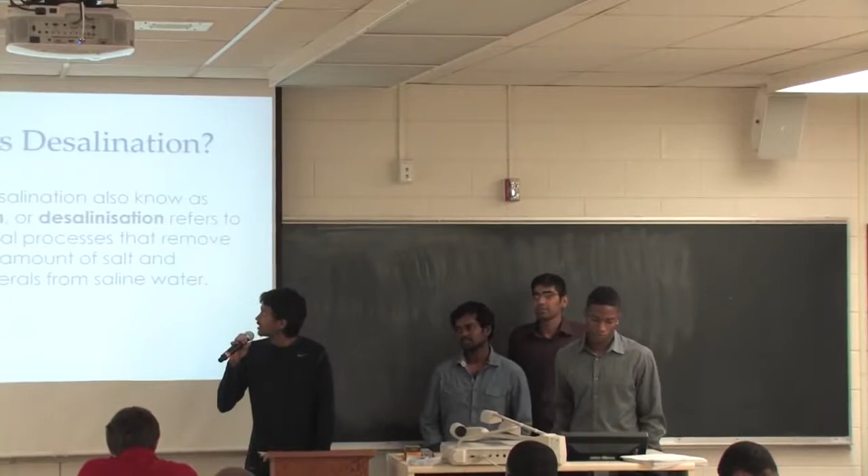Water desalination. The word itself means conversion of salt water into normal water by taking away the salt and other minerals. It's a very important process nowadays because two-thirds of the earth is covered with seawater. If we convert this seawater into normal water, we can eliminate the concept of drought in parts of the world. Moreover, it produces very little waste because the byproduct, salt, is also consumed by human beings. This is already implemented in countries like Australia and New Zealand.

Let me give you a sample, an easy process of how desalination is done. Consider a container with salt water. As we know, water's boiling point is lower than salt's. So we heat the salt water, the water evaporates first, and this evaporated water is cooled and condensed and collected into another container, separating the salt from the water and leaving the salt and other minerals as byproduct. This is how the simple desalination process is done.

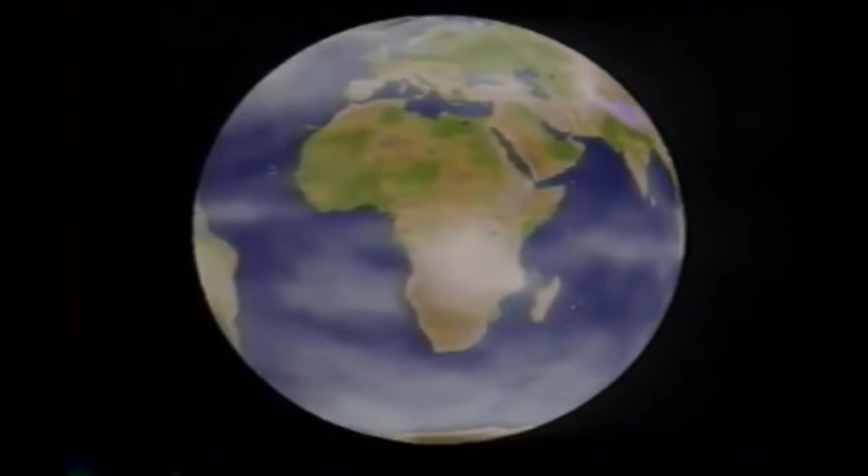The water planet. Third from the sun, and the only planet in the solar system where water exists in liquid form. In fact, three-quarters of the Earth's surface is covered with it.

Yet millions of people struggle to find enough water to survive. With the world's population growing by about 90 million people every year, the supply of usable water just isn't keeping up.

Usable is the key. The overall amount of water on the planet never changes. It's only the distribution of it that varies - as a liquid on the surface or below it, as a vapor in clouds, or as a solid at high altitudes and in the higher latitudes.

Making sure we have enough water in usable form and getting it to where it's needed is what water management is all about.

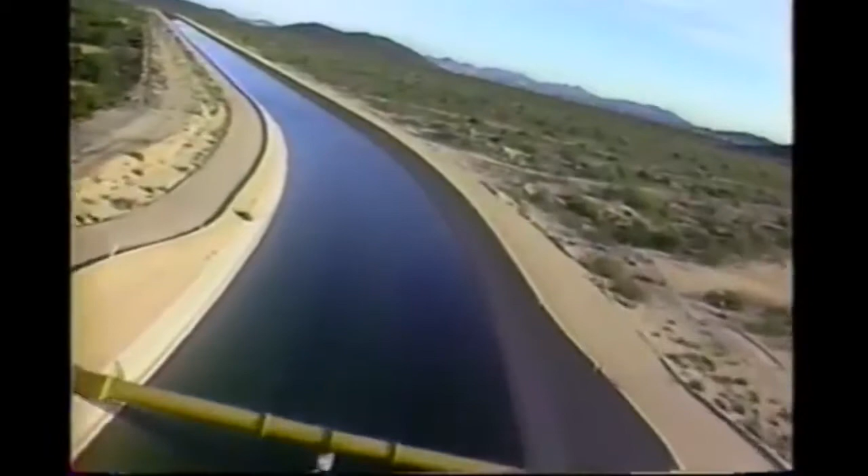Conservation is one method - using less water whenever possible. Building dams, reservoirs, and aqueducts. Cleaning up polluted water. And recycling water, especially for irrigation.

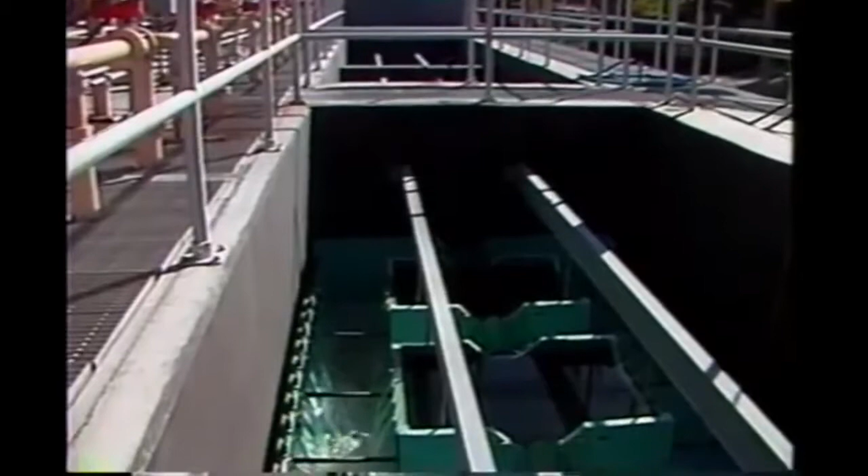Desalination, or desalting, is another method of increasing the supply of usable water. To most people, desalination means desalting seawater, unlocking the ocean's vast liquid treasure. Desalting seawater requires a lot of energy and has not been the top priority in the United States. It has been widely used in the Mideast, where the abundance of oil means inexpensive energy.

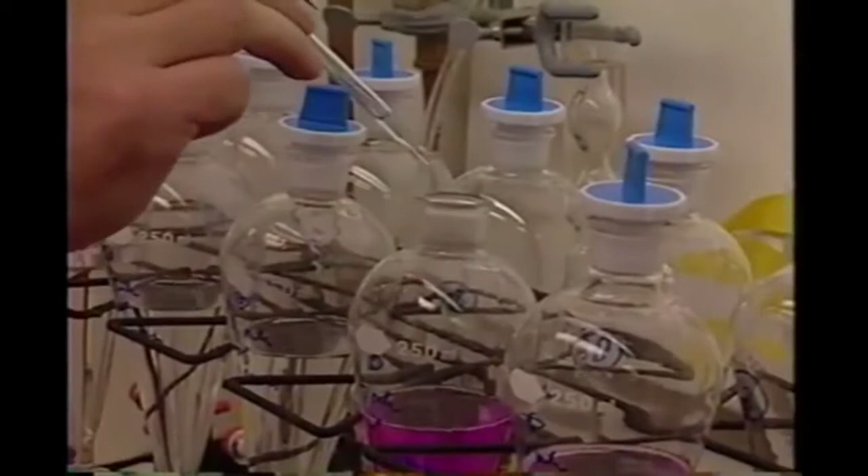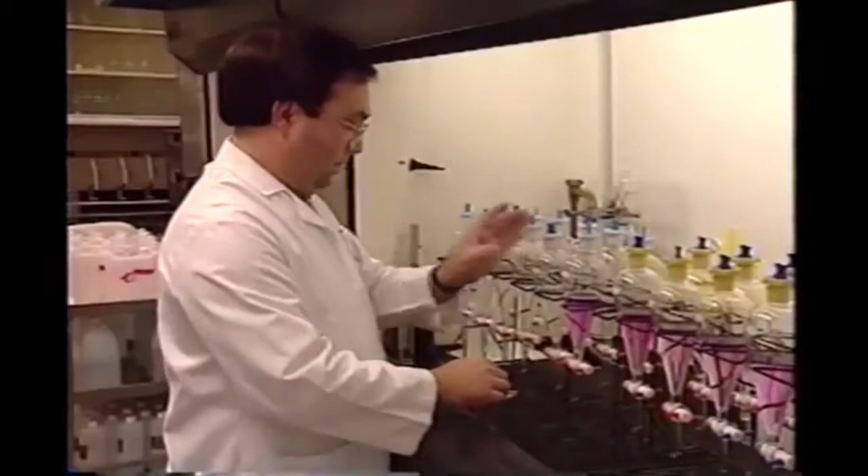But there's another use for desalination which is more practical and has just as much potential. By removing salts, minerals, and other contaminants, it can raise the quality of inland water supplies for use as drinking water or for irrigation. That's just a little bit about desalination. In the 4th century BC, Greeks...

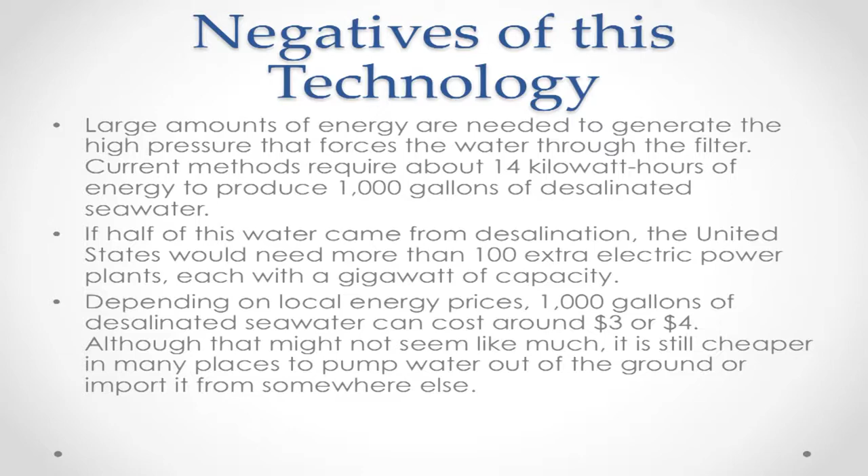Large amounts of energy are needed to generate the high pressure that forces the water through the filter. Current methods require about 14 kilowatt hours of energy to produce 1,000 gallons of desalinated seawater. Actually, these have more negative effects when we compare them to the positive effects.

The construction process also takes a lot of time, is inconvenient, and also affects the environment.

Desalination has main effects on aquatic animals. One of the major pollutants in this process is chlorine, which affects aquatic animals and leads to loss of many aquatic habitats. Moreover, one of the other drastic disadvantages of desalination is that it also pollutes the underground water. These are the main side effects of this desalination process.

Now you can popcorn. You choose if you want to pass the mic.

Multi-stage flash distillation is a water desalination process that distills seawater by flashing a portion of the water into steam in multiple stages, essentially using counter-current heat exchangers. Multi-stage flash distillation plants produce 85% of all desalinated water in the world.

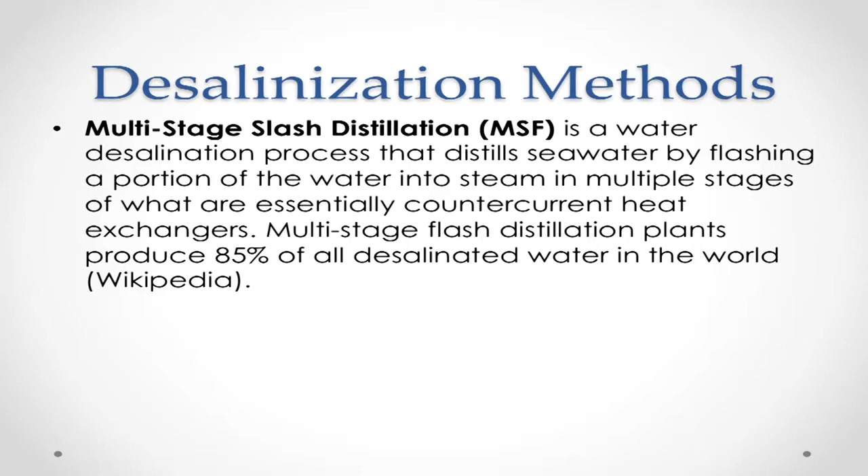As you have seen in the video, the water is evaporated and creates steam, and it again comes in the form of water when it is cooled. This is the process, and 85% of salt water is purified this way.

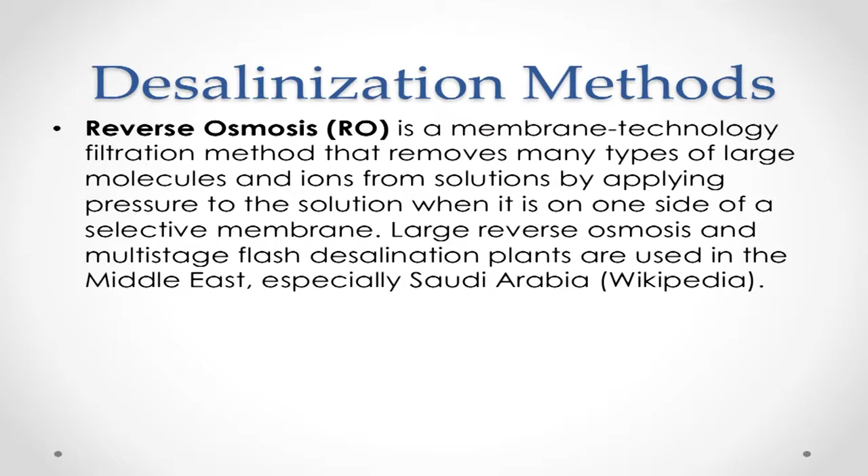Reverse osmosis is a membrane technology filtration method that removes many types of large molecules and ions from solutions by applying pressure to the solution on one side of a selective membrane. Large reverse osmosis and multi-stage flash distillation plants are used in the Middle East, especially in Saudi Arabia.

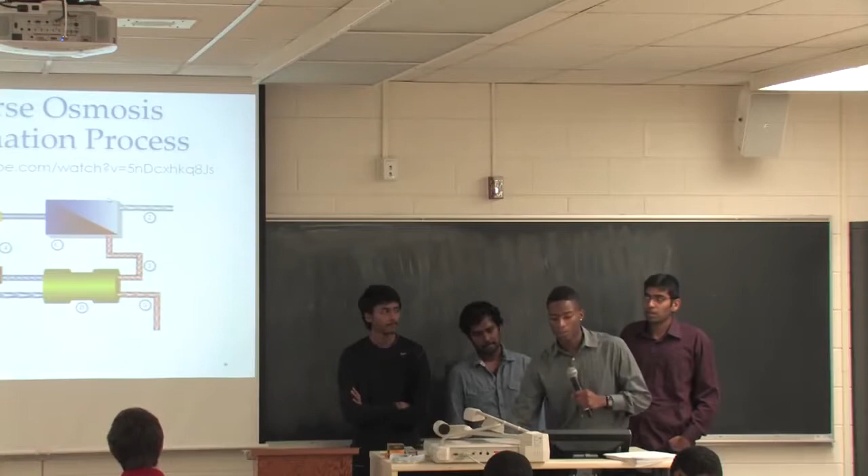This is just a video we had that was showing the whole process, but we've already kind of gone through that. I'll speak and then we'll go next.

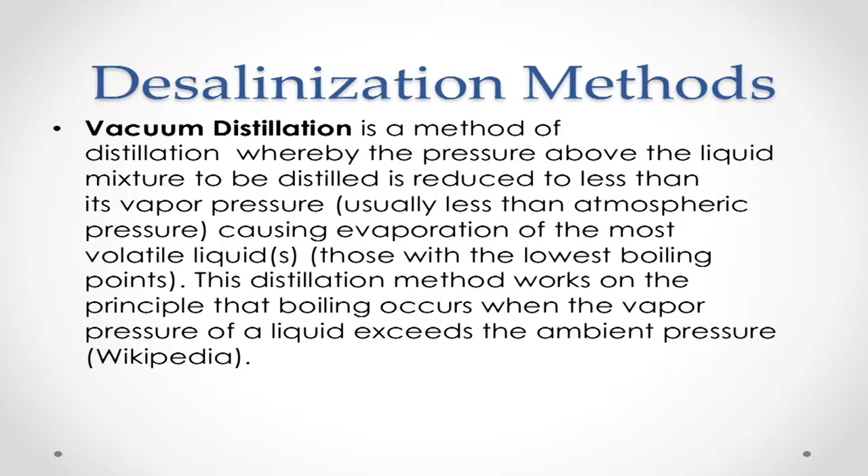Vacuum distillation is a method of distillation whereby the pressure above the liquid mixture to be distilled is reduced to less than its vapor pressure, causing evaporation of the most volatile liquids. This distillation method works on the principle that boiling occurs when the vapor pressure of the liquid exceeds the ambient pressure. This is just the most general form, where you boil the water, and since the water's boiling point is lower than that of the salts, the water evaporates, leaving excess salt and separating the water from the salt.

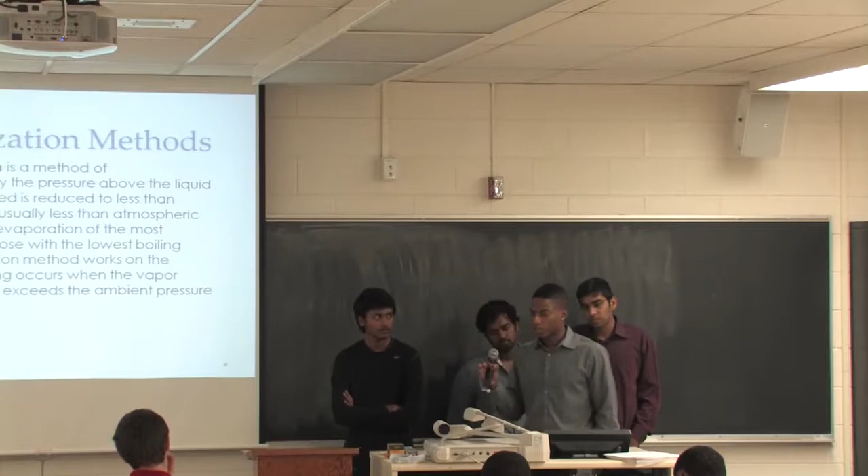Oh, okay, sorry, we need 3 more minutes. Oh, we only have 3 more minutes? Okay, we'll speed it up.

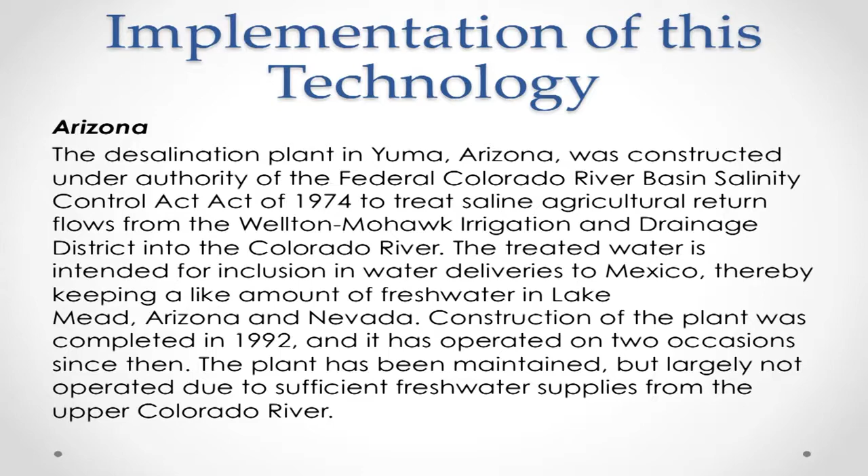We'll give you a few things about the implementation of this technology. There's actually a lot of implementation around the world. Arizona has an implementation where they constructed a plant which feeds the rivers. It's used to clean the rivers and some of the water sources out there, so it's not really so much for drinking. It's just to keep the water levels clean in those states and surrounding states.

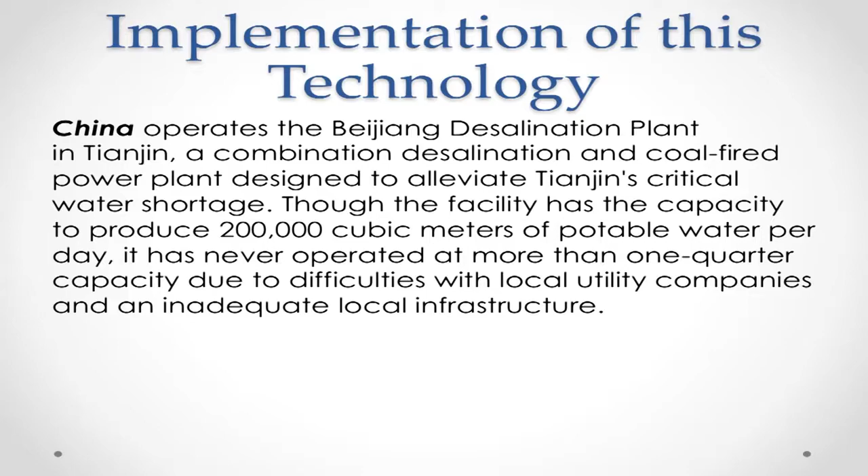China also has a major desalination plant which combines desalination with a coal-fired power plant, designed to alleviate critical water shortages.

We are implementing this technology because water is reducing day by day, and to meet the demand of the population, this technology is very useful. It is used in various countries, and according to research, different kinds of implementations are added into this technology.

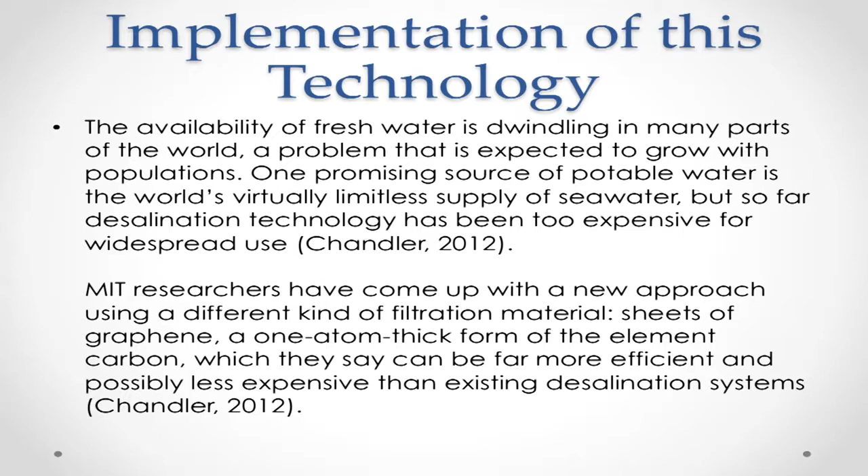Sheets of graphene are used in the filtration process, a one-atom-thick layer of carbon, which is also used in this filtration process.

Using these kinds of materials in the filtration process makes the implementation of this technology very cheap and very effective.

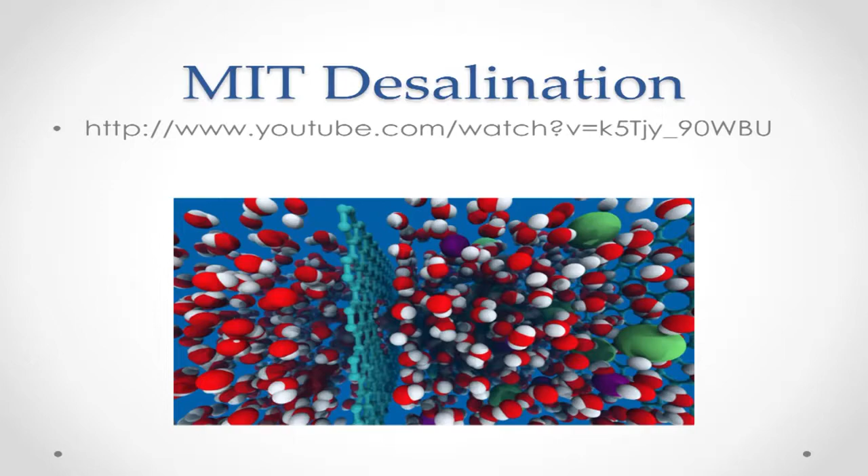And that was a video. So from the slide, you can see the graphene, which is used to separate those two products. And that is our slide.

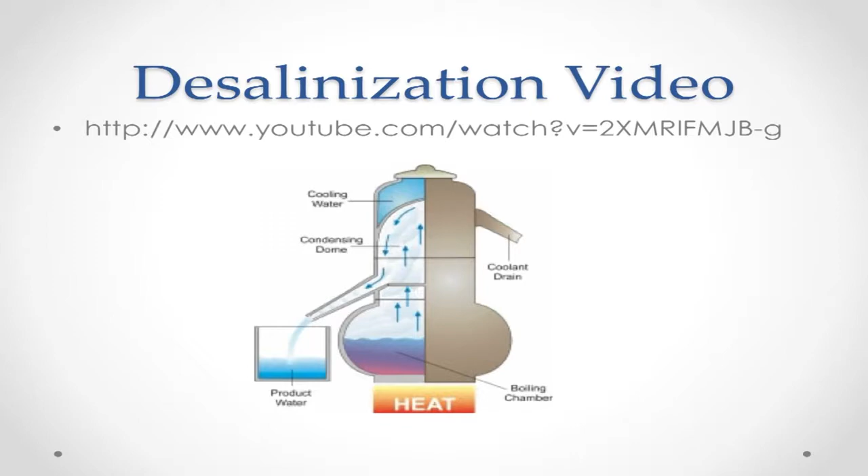Here's the process of how this desalination is done. Let us consider a container with salt water. As we all know, the water's boiling point is somewhat lower than salt. So we just heat the salt water, and the water gets evaporated first. This evaporated water is cooled and condensed and produced into another container, thereby separating the salt and water.

This process leaves the salt and helps combat drought in parts of the world. Moreover, it produces very little waste because the byproduct of this process is salt, which is also consumed by human beings. This is also implemented in countries like Australia and New Zealand.

The water planet - well, water desalination. The word desalination itself means conversion of salt water into normal water by taking away the salt and other minerals from the salt water.

It's a very important process nowadays because, as we all know, two-thirds of the earth is covered with sea water. So if we just convert this sea water into normal water, we can eliminate the...